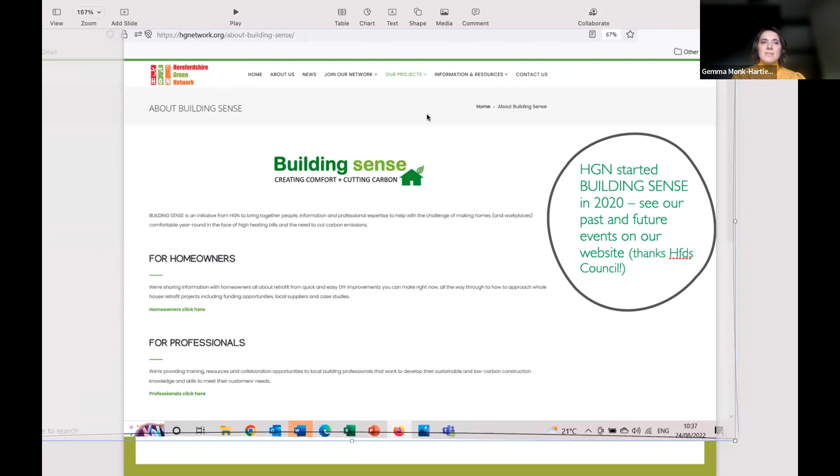Move on. Oh, sorry, just bear with me a moment.

Here we go. So Future Ready Homes is a programme that's running in Shropshire, Worcestershire and Herefordshire. It's being delivered by Marches Energy Agency and Severn Wye Energy Agency with the support of groups such as us, Herefordshire Green Network, Lightfoot in Worcestershire and Zero Carbon Shropshire in Shropshire. The main focus of the programme is to promote and support good practice energy retrofit of homes across the whole of the Marches area. And part of it is providing a number of free energy surveys and retrofit plans.

The scheme is looking for a really good cross-section of building types for those free surveys. So not everyone who applies will get the free survey. However, right now in Herefordshire, there are a significant number of additional free surveys and retrofit plans available, making it a really good time to apply. And most of those need to be delivered by the end of March. So if you are in Herefordshire and you are concerned about your property and you would like to consider retrofitting, please apply to the programme. We'll share more details about that after there's a follow-up.

So let me introduce you to Simon.

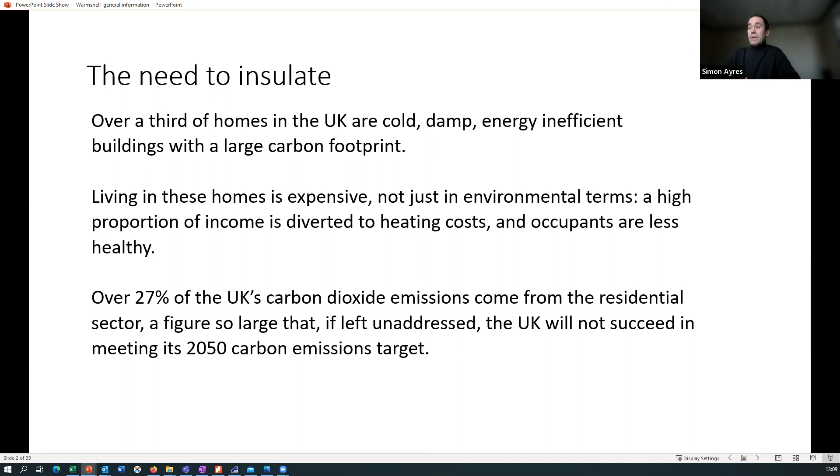You may already know this—approximately a third of UK homes are energy inefficient, cold and damp, and therefore have a large carbon footprint. Especially this winter, it's increasingly expensive to heat them. There's a knock-on effect for the environment, because a lot of income is diverted towards heating, and there are also knock-on effects for the health of the occupants. 27% of the UK's carbon emissions come from residential housing, and that's something we all need to address.

The insulation that we primarily deal in, supply and know most about is internal and external wall insulation. Again, primarily but not in all cases, a lot of that is aimed at what are called solid wall buildings.

Solid wall buildings are buildings where there is no cavity in the wall. A modern house will generally be built with a cavity to protect against moisture and wind-driven rain. Older houses, approximately more than 100 years old, are called solid wall, built with a solid wall. There's around 9 million of them, very approximately.

Of those 9 million buildings, the majority, but not all, were built with lime. Cement was invented in the early 1800s, but it wasn't really used for all uses until the 1930s or later. These buildings are perhaps best described as buildings of vapor permeable construction, or breathable—generally described as breathable.

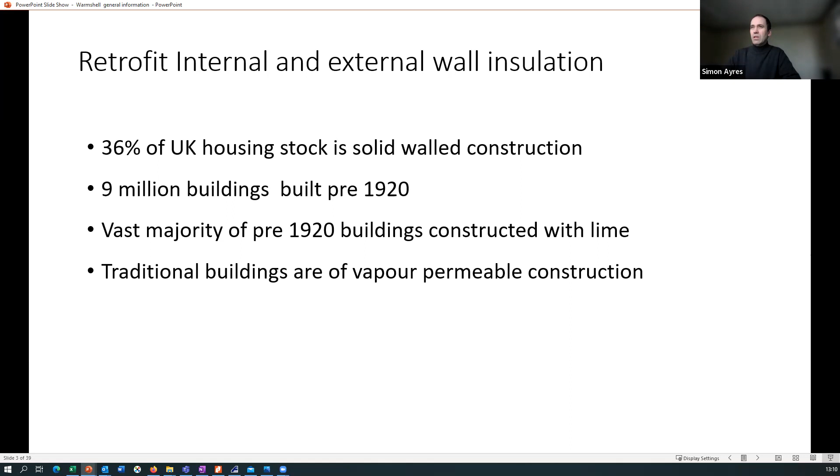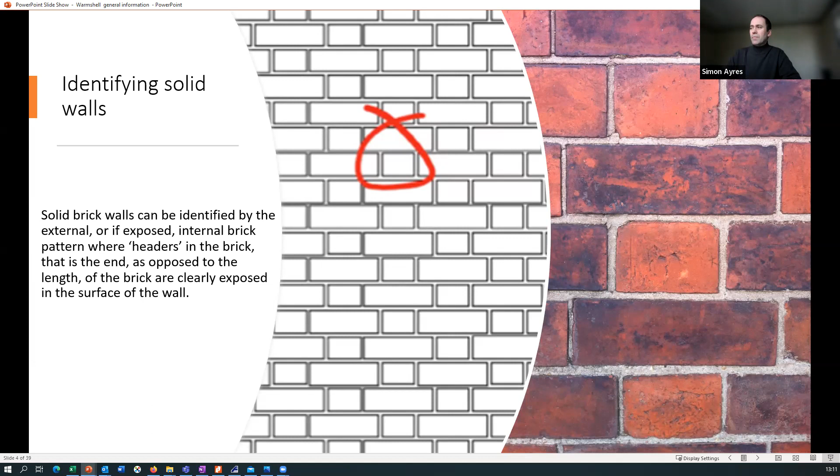Having determined whether you've got a solid wall or not—more modern houses will need insulating as well, but we mainly focus on older ones. The consideration for all retrofit insulation, whether external or internal, is weighing up a number of things. The three fundamental ones are: thermal considerations, and the risks associated with adding insulation to an older building. Older buildings weren't designed to be insulated, so by fundamentally changing them, the building physics change and risks are introduced.

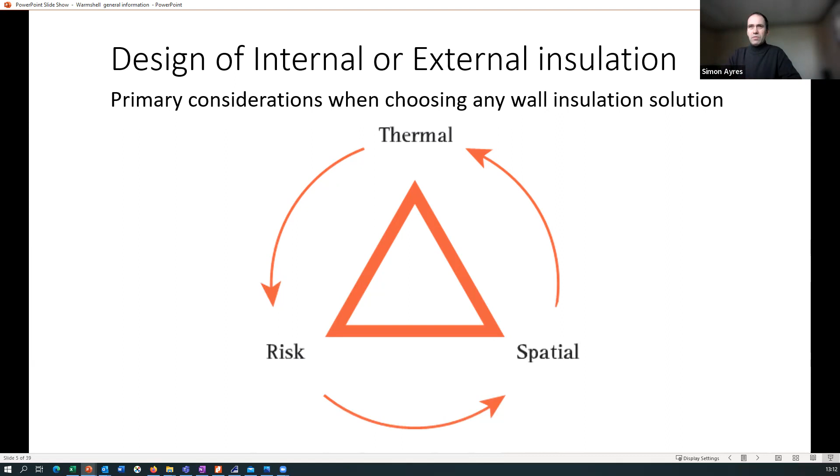And then there's the spatial considerations—like if I add insulation on the outside of my wall, I keep all the space on the inside, but have I encroached on the neighbour? Have I encroached on the footpath, or these sort of things? So there's the practical nature of it.

Insulating externally is the more efficient of the two means of insulating a wall. If you think of it like a tea cosy, it envelops the whole house and does a better job of cutting thermal bridges—thermal bridges being bits of the wall which are difficult to insulate. I'll come on to that a bit later.

Drawbacks: it can change the appearance of a building, particularly if it isn't rendered in the first place. Adding external insulation—external insulation is mostly rendered as a finish. It can be timber clad, or clad in other materials, but it's usually rendered. So if a building is unrendered at the moment, adding external insulation will definitely change the appearance.

With the detailing, adding insulation to the outside of the wall grows the footprint of the building. So the water detailing—things like the roof, downpipes, what happens at the bottom of the wall, junctions with chimneys—all those things have got to be taken care of. You will also potentially lose period details if it's unrendered at the moment, and it might be difficult to change the appearance if it's a listed or protected building in some way.

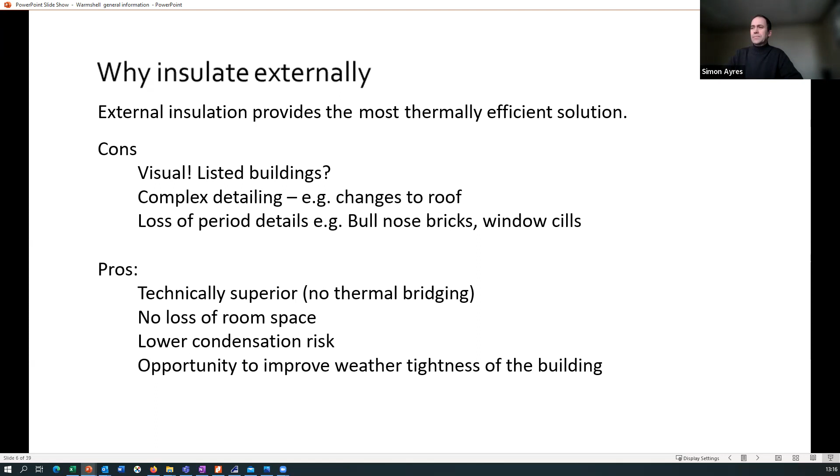Internal insulation - for and against - it's complex dealing with inside.

Intersecting walls and floor zones are the difficult bits to insulate, and they end up being thermal bridges, areas where heat can bypass the insulation. Doing it internally, if you have an example, might be a staircase that runs parallel with an external wall - you can't fit insulation between the staircase and the wall.

You might, just like outside, lose period features - things you want to keep - or you might end up hiding them because they're hidden behind the insulation.

It is riskier from a condensation point of view. That building physics thing kicks in again, and when you insulate internally, there is more risk of moisture occurring within the wall. I'm going to speak about this a little bit later, and its relation to natural insulations.

Because of the thermal bridging, as mentioned, you can add exactly the same thickness of insulation inside or out. When inside, because of those thermal bridges, you get a lower performance.

You lose some space, though it's not quite as much using the sort of system we recommend as you might think.

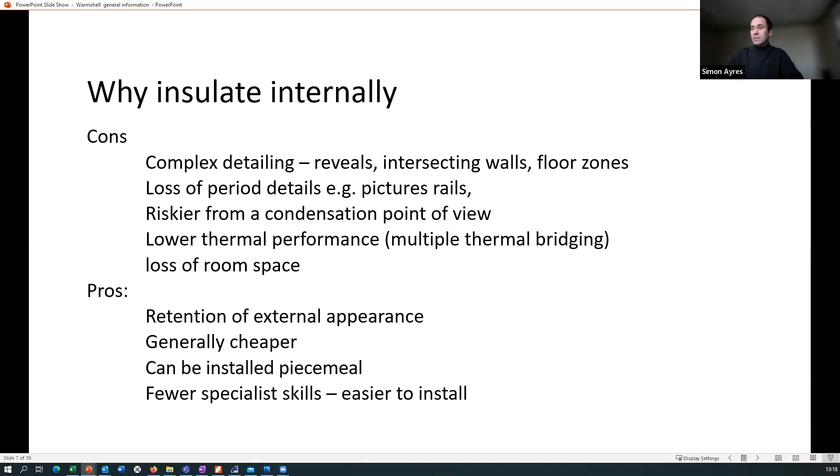Okay, types of insulation that you might use for either internal or external basically fall into two main categories: those that are synthetic, which might include expanded polystyrene, extruded polystyrene or foam products, thermoset foam products, and the inorganic. Inorganic would be mineral wool, foamed glass, things based upon mineral and things like that.

So there's pros and cons to all types of insulation. I'll comment on those a little bit later on.

Natural insulation would include things like wood fibre, that could be flexible or rigid, straw, sheep's wool, which is generally flexible, products like hempcrete. But in general, these are all materials that are biogenic, or materials that are grown, so they are essentially renewable.

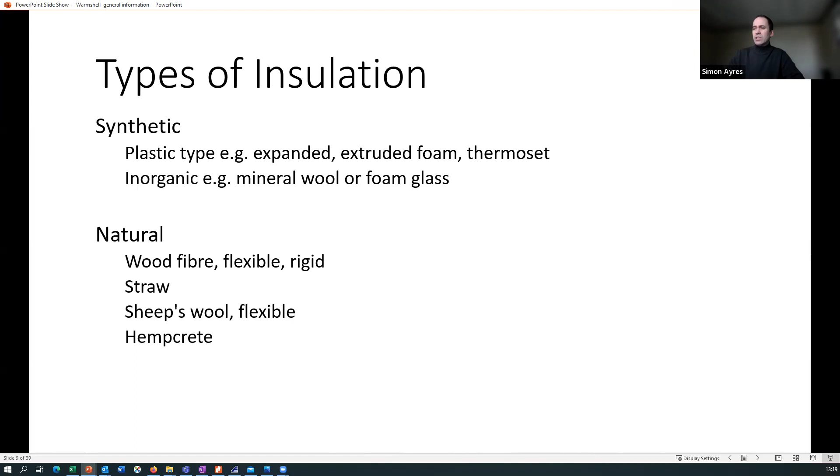If you want to look into this a little bit further, we are a member of the ASBP, Alliance for Sustainable Building Products, and they've got some really useful guides on all sorts of different topics, and their 6 pillars of sustainable construction kind of follows through for when you're choosing your materials.

These speak for themselves more or less, but health and well-being - how does the material affect your health and well-being - the resources used to make the material, the embodied carbon in it, the ethics and the transparency of the company or companies making it or supplying it, its technical performance, obviously very important, and social value.

So you can go to the ASBP website, and lots of stuff on there, and lots of useful information too.

So we think it's important to think about it with the ASBP's 6 pillars in mind - the multiple roles of insulation.

Obviously, insulation, we also know insulation as the material that saves us heat, but actually it's more than that. There are other things which perhaps are, to a greater or lesser extent, just as important, such as acoustic - you can use insulation to insulate against noise. Some insulations naturally have good acoustic and thermal performance, an example would be a wood fibre board. Fire protection, health, comfort, buildability, durability, and sustainability. So there's quite a cross-section there.

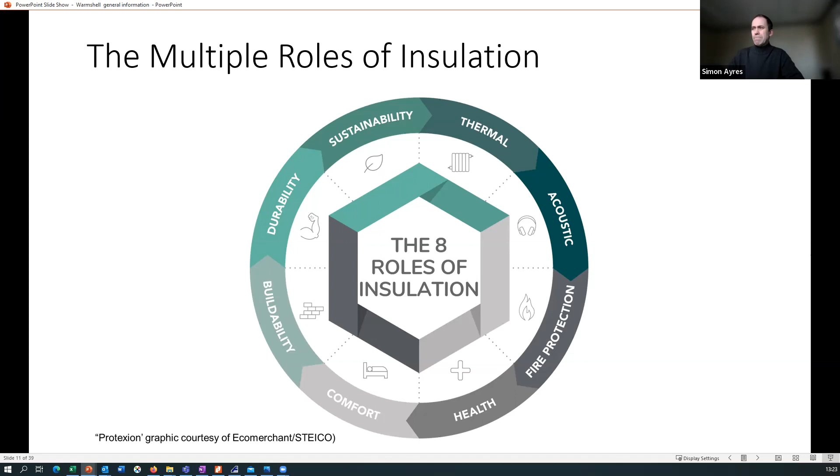So natural insulations offer thermal performance with added benefits. They're not just a one-trick pony. The thing they do really well, many of them, particularly wood fibre, which I'm speaking mostly about today, is moisture regulation. That has a huge knock-on effect for indoor air quality and the longevity or durability of the structure, and therefore of the retrofit.

Specific heat capacity is less important with wall insulation unless it's a timber frame, but some insulations have the ability to reduce or dampen the effects of summer heat, whereas others are not very good at it at all. Generally speaking, lightweight insulations, particularly in an attic space, you might be familiar with this, can really heat up the attic. It might be well insulated, but it can heat up in the summer and overheat.

Already mentioned this - wood fibre is very good at dealing with moisture. It can absorb, store and release it without affecting the thermal performance. Sheep's wool is also good in that regard.

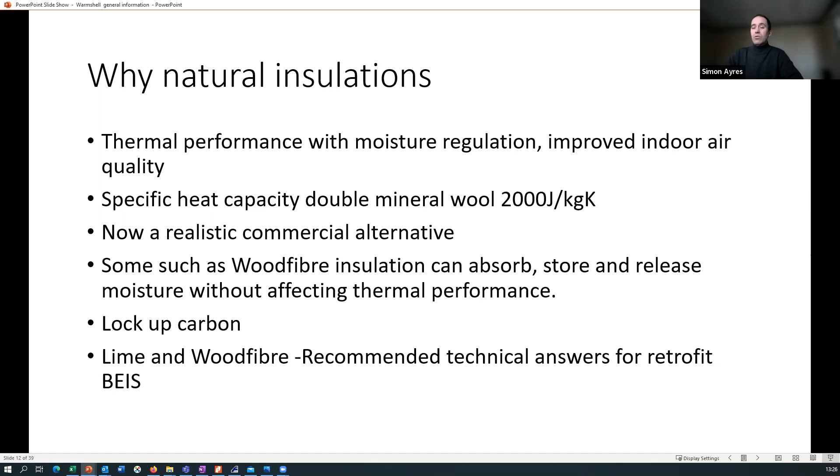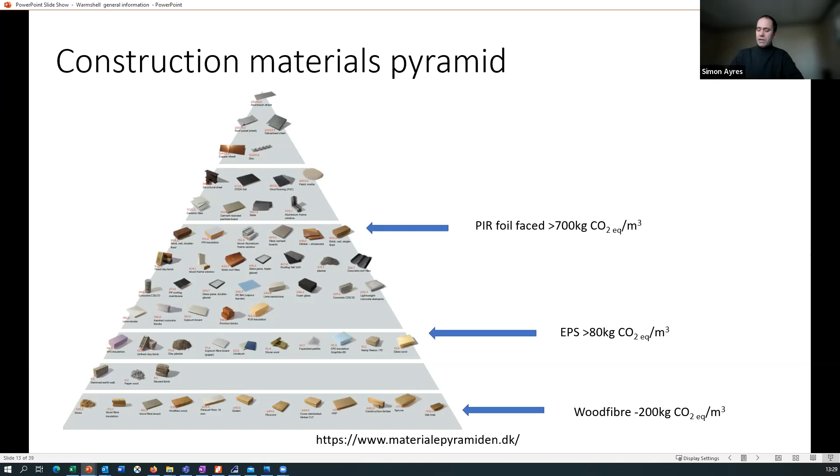There is a difference in thermal performance and other aspects, but in terms of carbon released during its manufacture, you can use the website there - it's got a little calculator if you want to play around with things and work it out for yourself.

And you get this U value.

Simon, your sound is dropping out a little bit. Oh dear, it literally was just for a few words and then it was back again, sorry about that, I don't know why. Let me know if it happens again and I'll repeat myself. Will do - shall I go back to the beginning of this slide? Yes, let's do that.

So U values, as it says there, are used to calculate the thermal transmittance of a wall, of a part of the building or an element of the building. They're calculated from the thermal resistance of each part of the build-up. So if it was an old wall, you would use the bricks, the mortar, the plaster and so on, add them all together, and you get the U value.

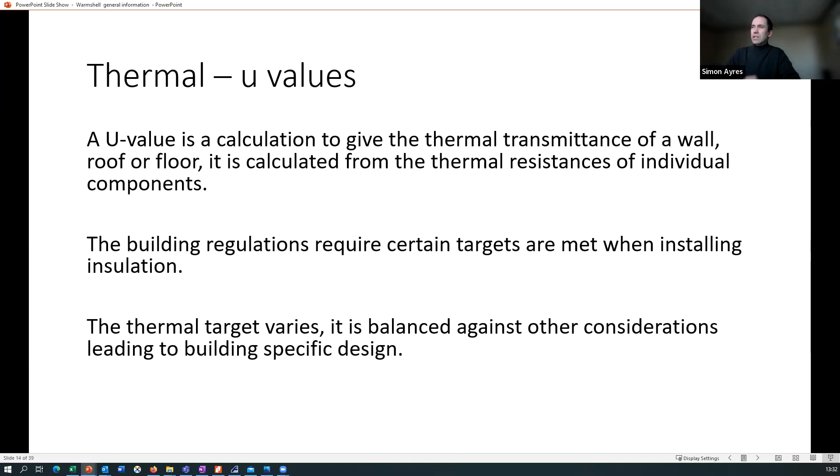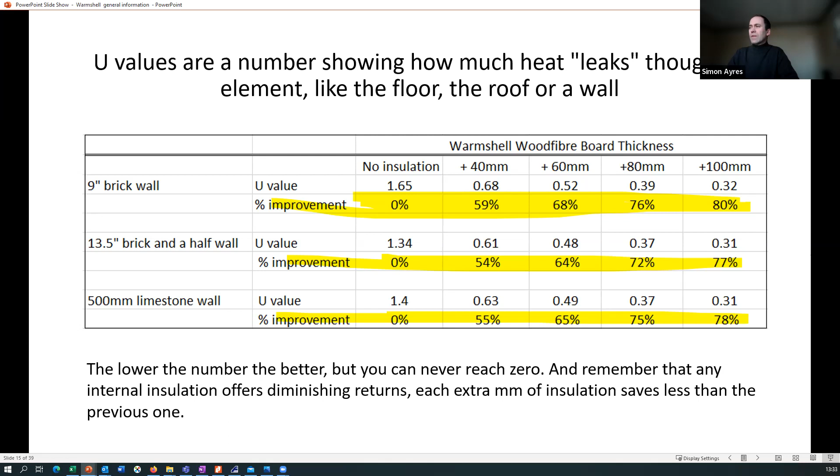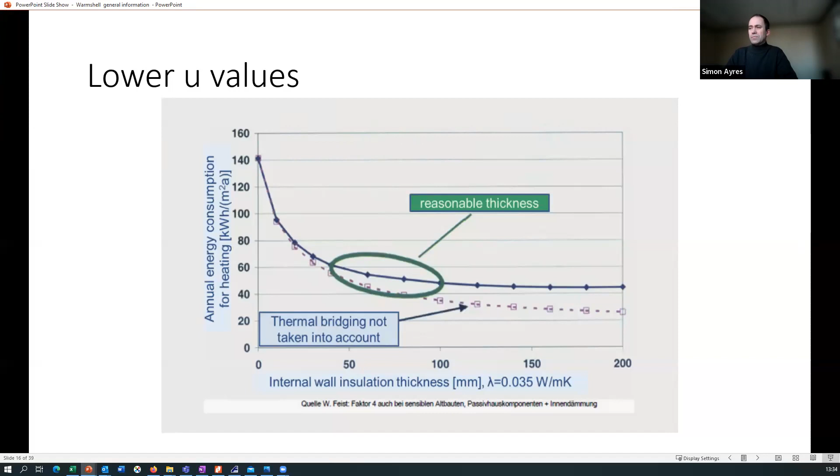Now, risks. Risks with retrofitting insulation are primarily related to moisture, but there can also be fire and other things as well. One of the biggest risks for internal and external insulation is primarily to do with moisture - external insulation vastly reduces the risks from moisture. This is to do with the fact that you're changing a building that wasn't designed for insulation to have insulation, and that changes the building physics. It will mean you need a different, better ventilation system - the building regs mention this. If it's not done correctly, there are risks.

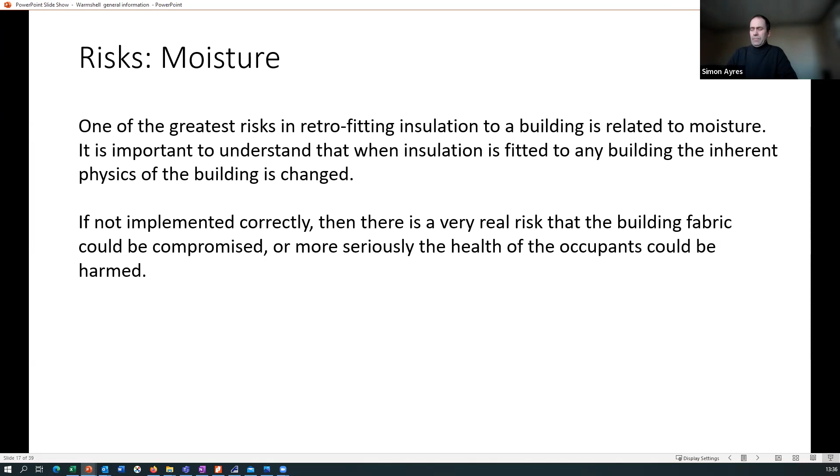Why is moisture important? Moisture poses risks to the building and also to people living in it. Water, moisture, is important for the comfort of general living, health and that sort of thing. High levels are uncomfortable, low levels equally so. With high levels you can think about mold growth and bits of timber within the wall rotting, and that sort of thing.

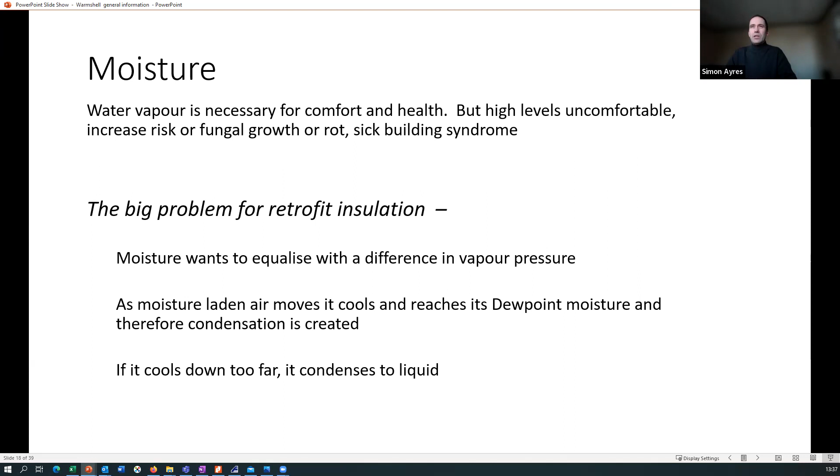Why is this important in solid wall buildings? Well, it's because they're built differently and are of permeable fabric, as the building regulations describe it. That means they're breathable, so moisture is able to equalize from inside the wall to outside. It's not always a free passage, depending on the material, but moisture does move through the wall. As it cools down, a dew point occurs, where water vapor changes to liquid water.

One of the big differences between the products we sell and some of the more synthetic insulations, gypsum plaster and that sort of thing, is how they deal with moisture. It's really, really important in retrofitting, because moisture is something we want to avoid.

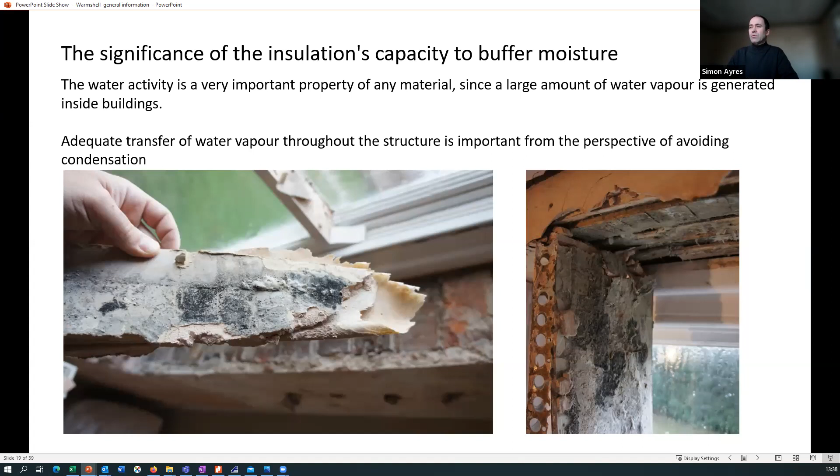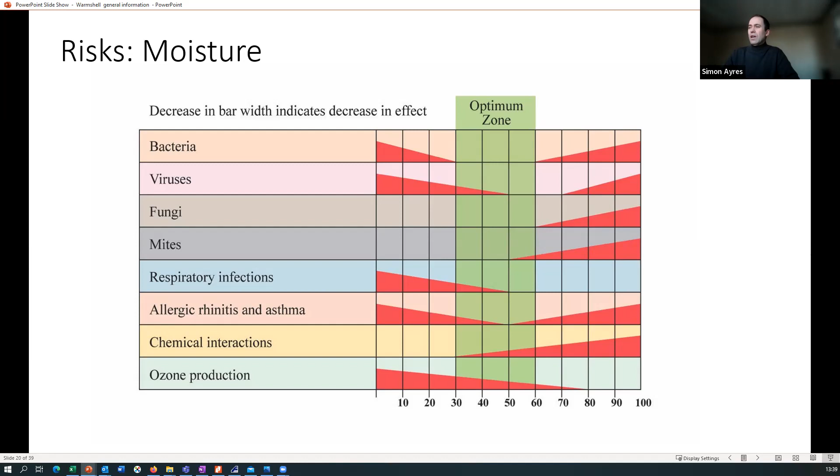So this is all to do with moisture. Yes, you can have a ventilation system, but ventilation systems are often quite difficult to retrofit in older buildings. So it's important to use material that buffers moisture, which the materials I'm talking about, or that we supply, do.

So where does moisture come from? Just a quick detail on that - obviously sleeping, cooking, washing, that sort of thing. But it adds up to somewhere between 9 to 15 litres a day. That's quite a lot, and it's got to go somewhere.

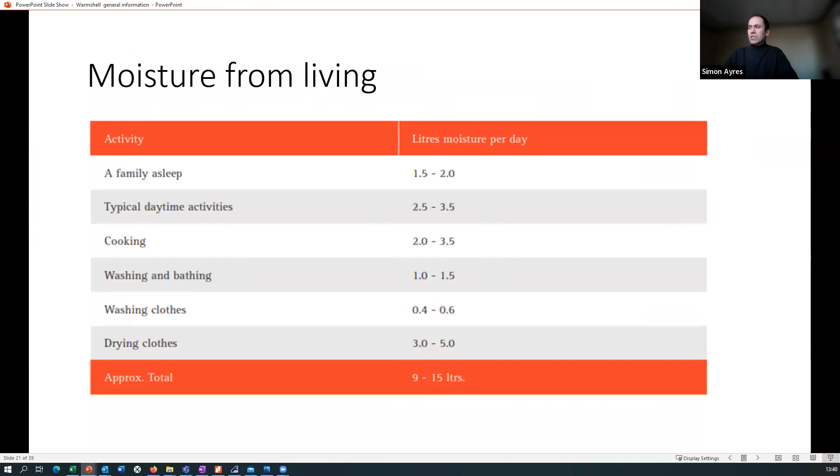So I've spoken about breathability. Natural materials such as the wood fibre we sell are described as breathable. Well, everything's breathable, unfortunately. So trading standards aren't going to tell you enough by just describing products as breathable, because breathability can be measured for all sorts of things. You can measure the breathability of lead, or of a plastic bag. Neither is described as highly breathable or suitably breathable.

But they nonetheless have a breathable, or vapor resistance value, as it's known. Confusingly, it looks a bit like the U value, but it's a Greek symbol - a mu value. This is to do with the vapor diffusion resistance of a material. The greater the number, the more resistant it is to water vapor. Wood fibre, sheep's wool, and lime are all down at about a mu value of 10 or lower. Concrete and foil-backed insulation are up in the hundreds. And lead, which I mentioned, was 10,000. So it's not a switch breathability, it's a scale.

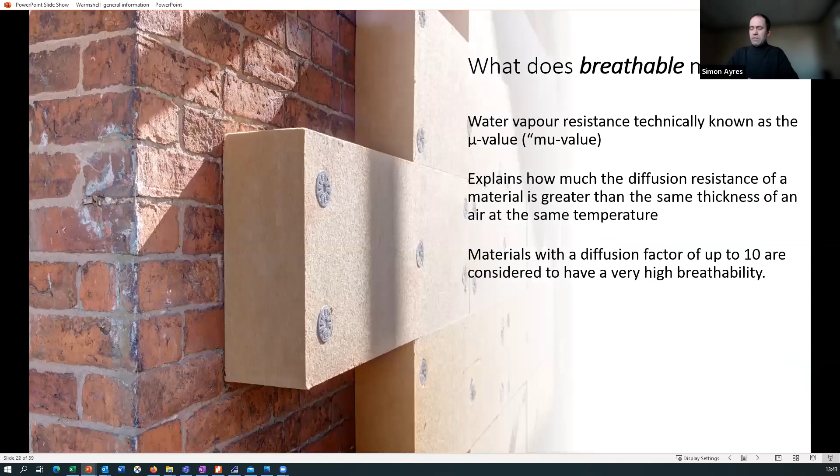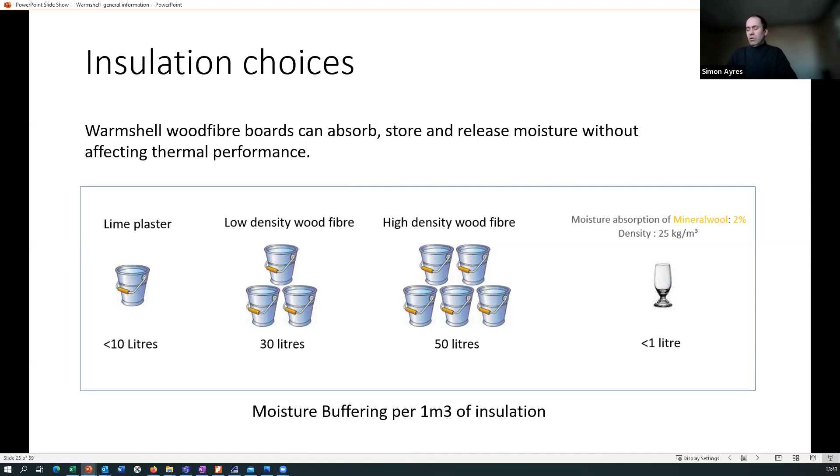The boards that we saw in the photograph here are high density or rigid wood fibre sheets, wood fibre board. They can hold 50 litres of water per cubic metre. Flexible wood fibre holds 30 litres, that's a bit like sheep's wool, and lime plaster less than 10 litres. So there's a scale of how different materials interact and deal with moisture, which has a knock-on effect in terms of building health and occupants' health.

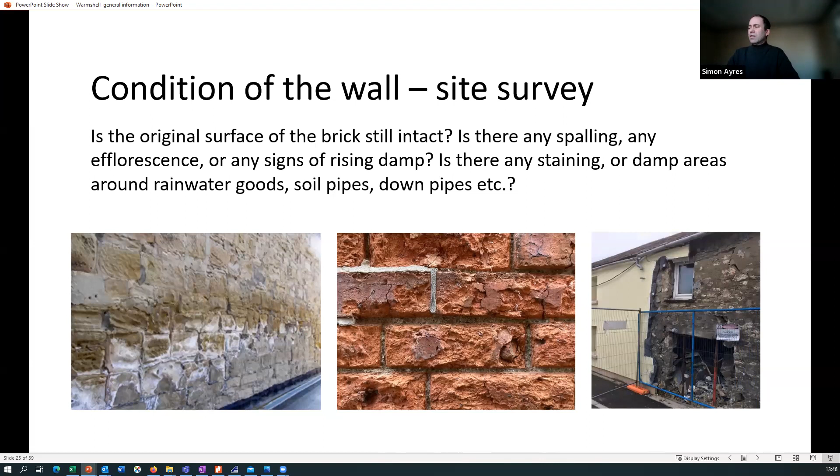This was left in a really bad state of repair. Lots of timber repairs, brickwork repairs, new roof.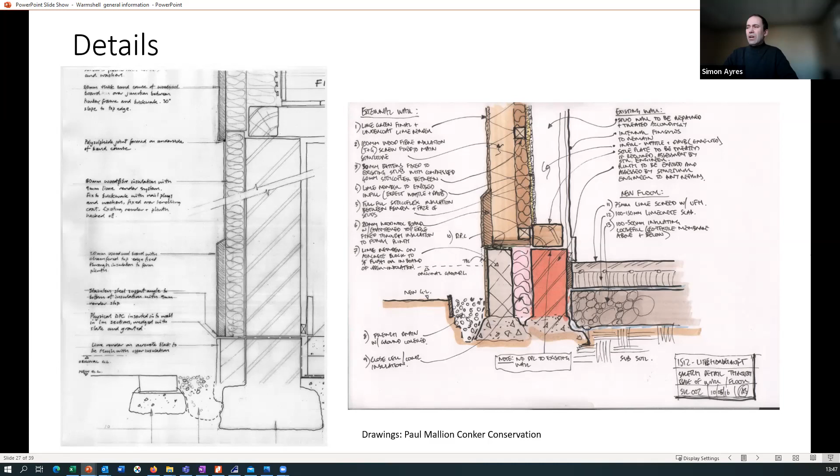He's used wood fibre fixed directly to the brickwork downstairs, wood fibre boards directly fixed to the timber upstairs, and sheep's wool insulation between the timber studs. Now, all of this is a breathable system, so no moisture is stuck in that timber frame, so it won't rot.

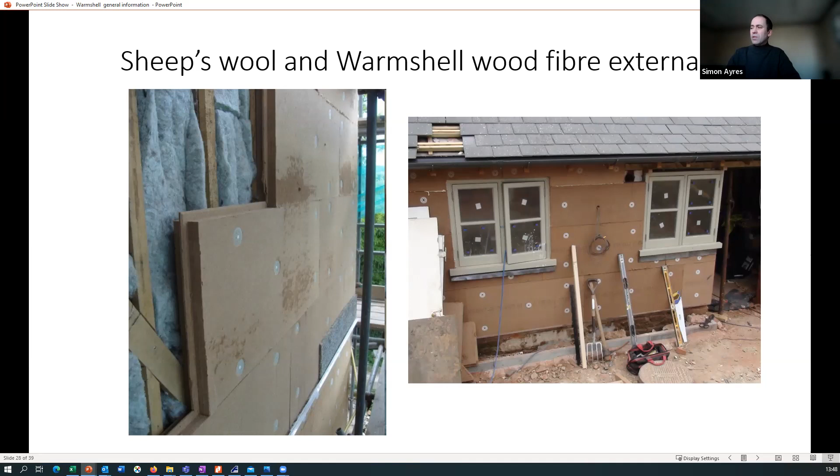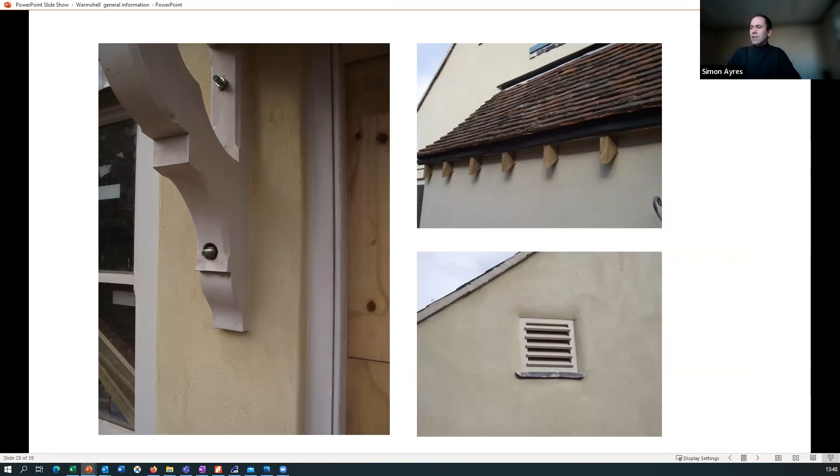The insulation over the top cuts the thermal bridges, and then it's going to be rendered. Note the detail around the plinth on the brickwork. He's sorted everything here. Some photographs slightly before the finish, showing how the roof was extended slightly to cope with the new thickness of insulation, ventilation grille, and the finished job.

This one's about, I think, 12 years ago or more. And they've used a lime render that we make that's self-coloured, so they don't have to paint it. So if you think back to the nice Georgian brick, half rendered building at the beginning, you wouldn't necessarily know this was insulated and a really thermally efficient building.

Right, sorry if I can speak. Internal insulation - we recommend that our internal insulation system is fitted directly to the solid wall, so you haven't got a gap or cavity.

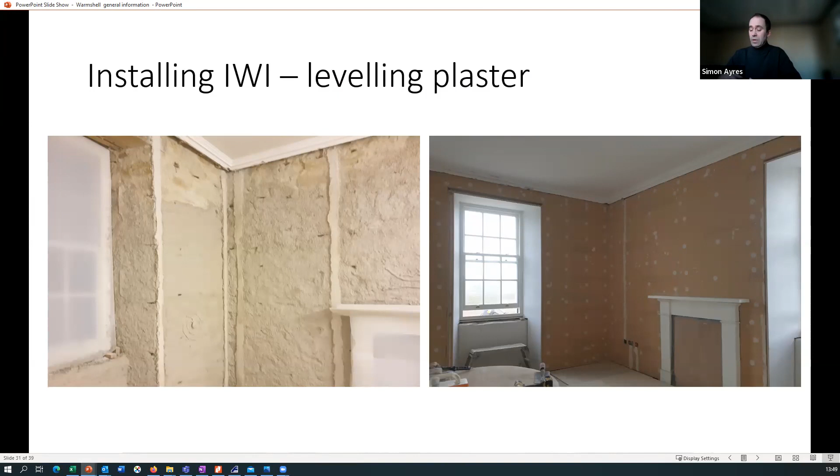We've looked into this thoroughly over the last 10 years, researched it, as others have, and it works better if you've got a solid wall to do it, as shown in these pictures here. So you have a levelling plaster made from lime, which allows moisture to go through the wall.

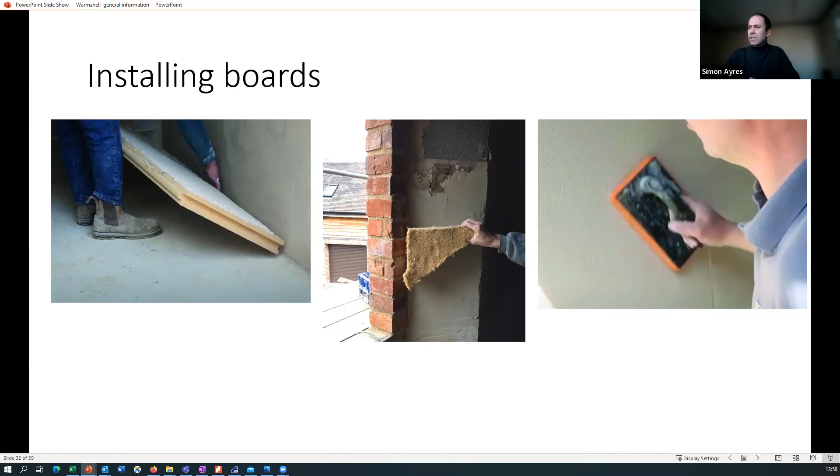Then the boards are fitted. In the photograph on the left, boards are fitted to the wall over the levelling plaster, taking care in the middle there to try and include insulation right across the wall. When you're doing internal insulation, you don't want to leave any bits uninsulated. And then over the top is the finishing plaster that we make.

So there's four components in essence: levelling plaster, the lime-based adhesive for the boards, and then we have a one-coat lime plaster that goes over the top of the wood fibre boards. It's all solid on the walls, and it works really well because it's breathable. It buffers that moisture, controlling the indoor climate.

And it locks up carbon because of the boards. This was chosen here by an architect in London for his Victorian house retrofit and his new extension, and he did it on all the walls and ceilings, and left it unpainted because he liked the look.

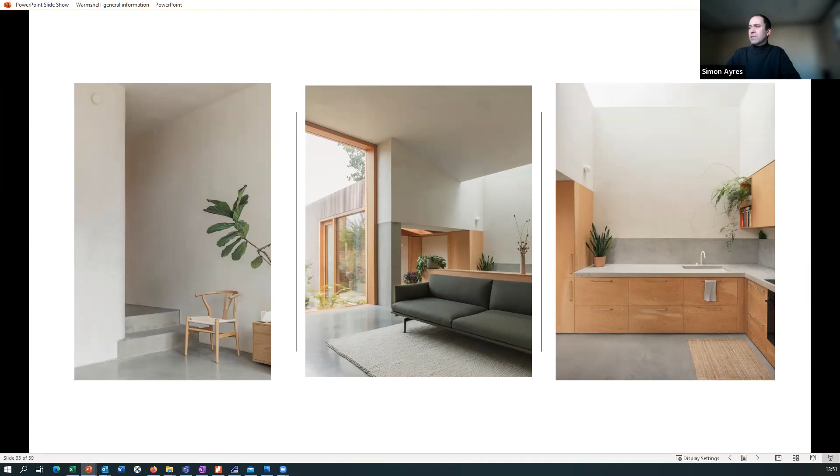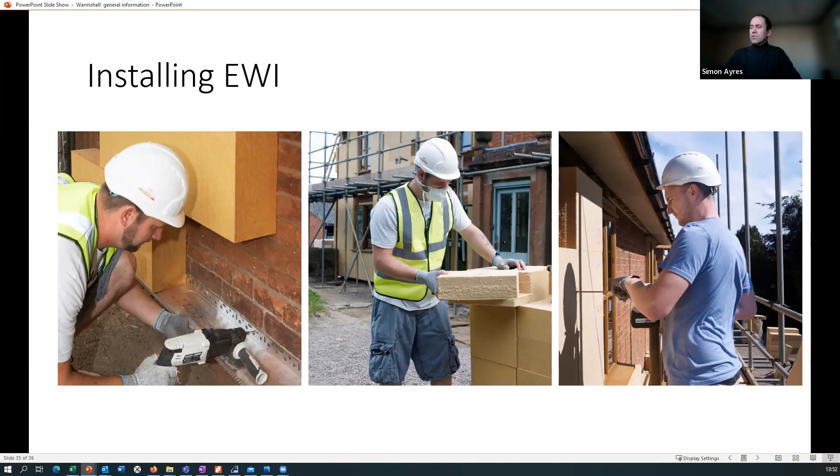Here on the left, there's a starter track where the system starts. It's installed in a very similar way to other systems in reality - it's just the materials chosen are different. Cutting the boards, fixing the boards, mechanical fixing, holding the board to the wall.

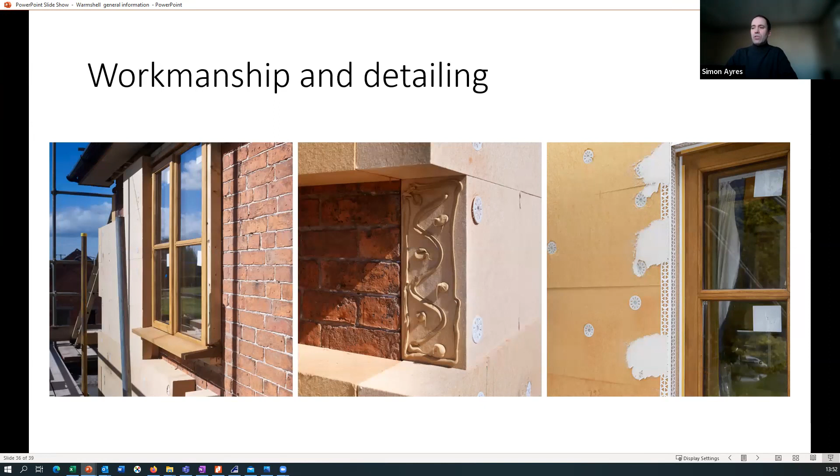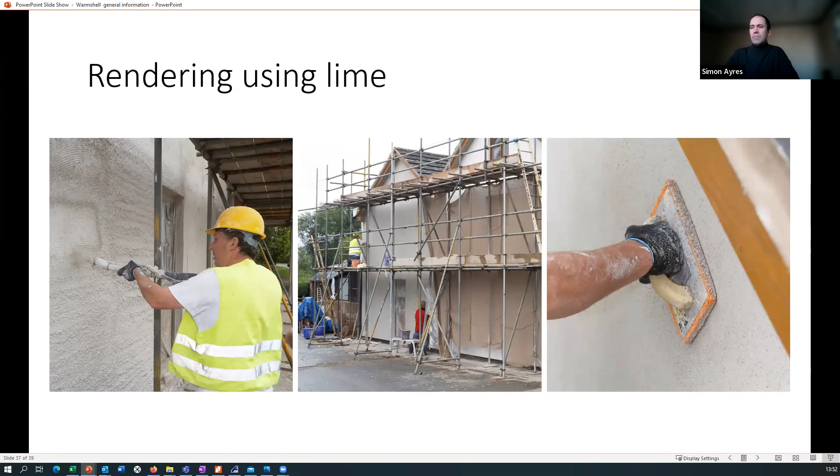Some important details here, can't quite see it on the left-hand side. The eaves have been extended, the windows have been renewed and moved forward to make the most of the thick layer of insulation, and then it's plastered and rendered using one of our lime-based renders. And it ends up looking something a bit like that.

And that's me, finished. Excellent. Thanks, Simon, that was excellent - a really good talk. Yeah, brilliant.